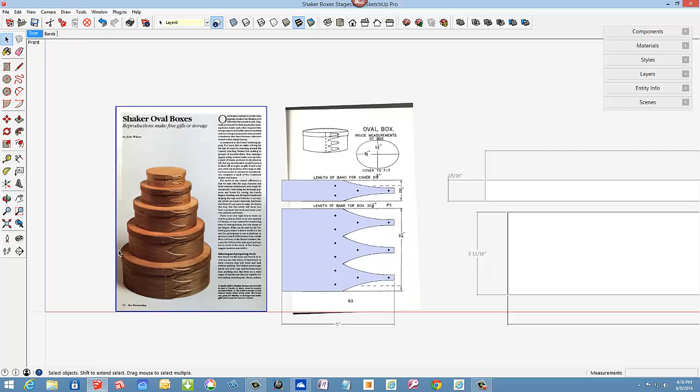The following video shows my process of creating the first stage of making a number 5 shaker oval box.

I use several resources for this. One is a fine woodworking article by John Wilson in September-October 93, and the other is Ejner Handberg's book on shop drawings for shaker furniture.

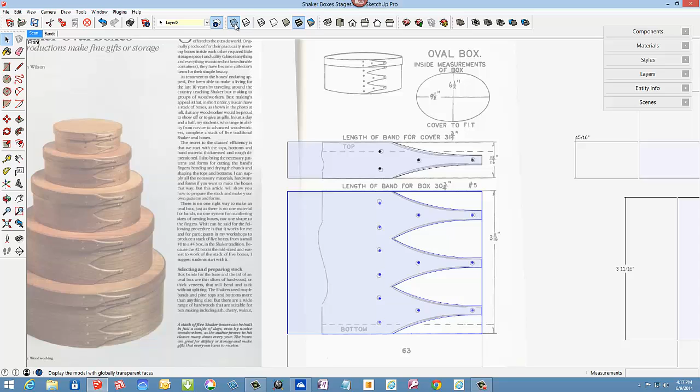You can see that I've made a trace over of the finger shapes, and I've used these trace overs to make the full length bands that are bent around an oval box, or make the oval box.

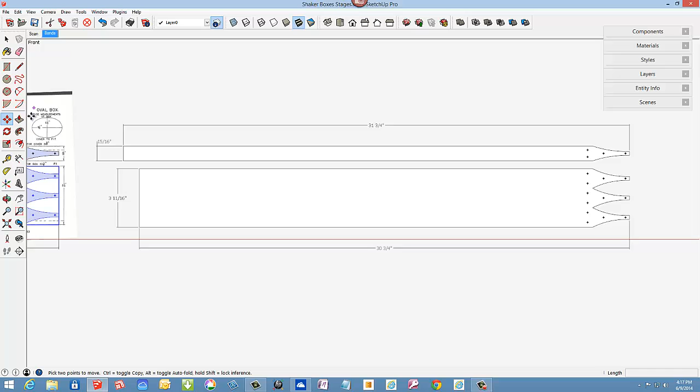So here are the two, both the box band and the upper cover band. The next step is to create the actual box bend, which makes an oval box. This is an ellipse, 6.5 by 9.5.

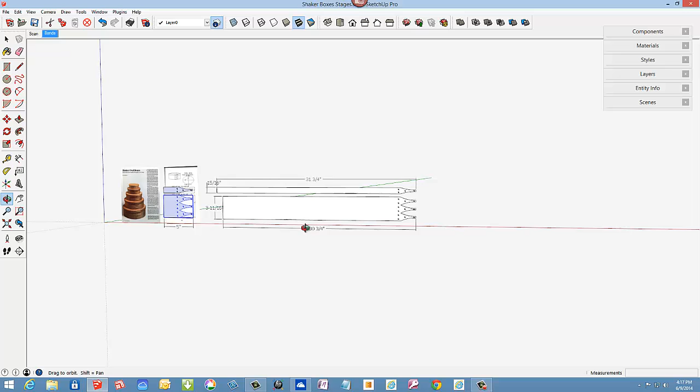I'll go to perspective camera and pick the circle tool to start the creation of the ellipse. Notice that I've used sides at 48. The normal is 24, but with this kind of a small piece, I think that makes sense.

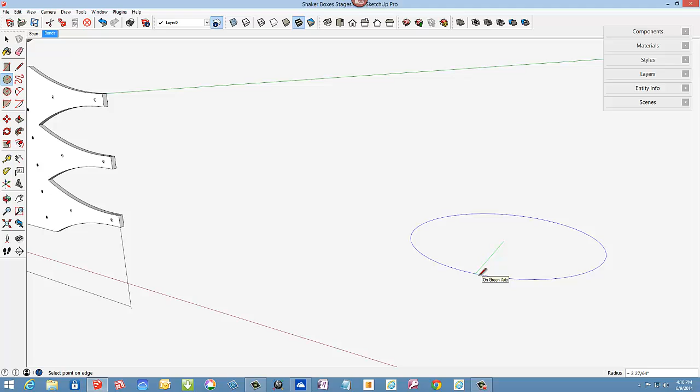Here I'm making the circle at radius 3.25, so I've got 6.5 at that minor dimension of the final ellipse. We need to change this circle into an ellipse, but first I'm going to show the center of the circle.

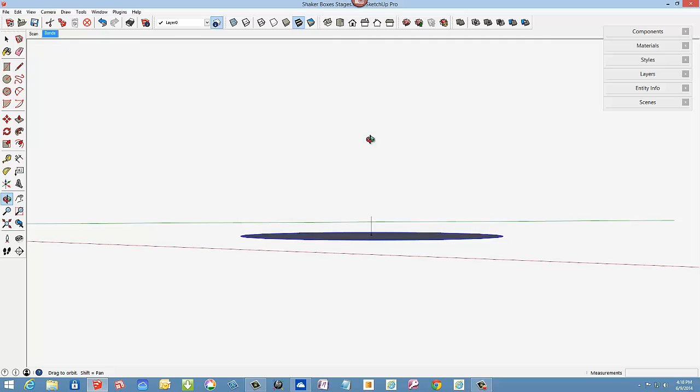I'm going to need this as reference later, and I'm going to show on the blue axis two lines here representing the vertical axis. I'll need those later to fit together the various parts of the oval box.

Here is a radial line on the green axis, showing the length of the long axis of the ellipse, which in this case is 4.75 radius, making the 9.5.

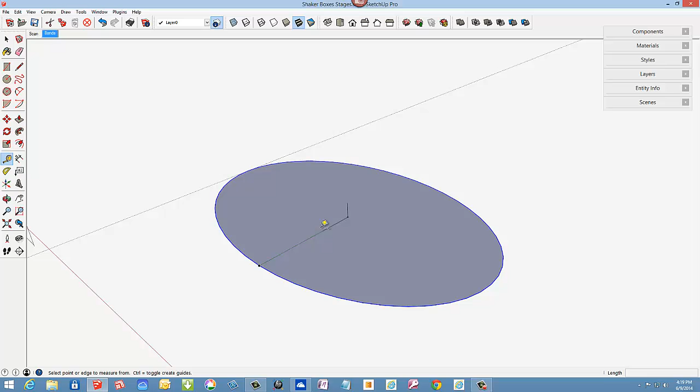Pick the scale tool, hold down the control key so that I'm working across the center line, and go out to the guideline and click to finish the elliptical shape.

Next, I'm creating some guidelines to show where the banding actually overlaps. The overlap is about 5 inches from the beginning to the end, and I'm showing that overlap area, picking the tool to make the thickness of the band.

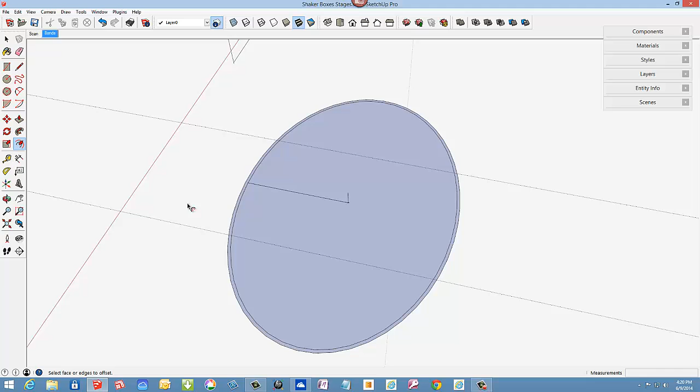Remember, this ellipse shape that I made at first was the inside shape. Now the banding thickness has been added - that's 0.085 inches based on what I've been reading for a number 5 box.

Now with the arc tool, I'm showing that complicated overlapped part of the banding from the beginning to the end, with 2 arcs that overlap here.

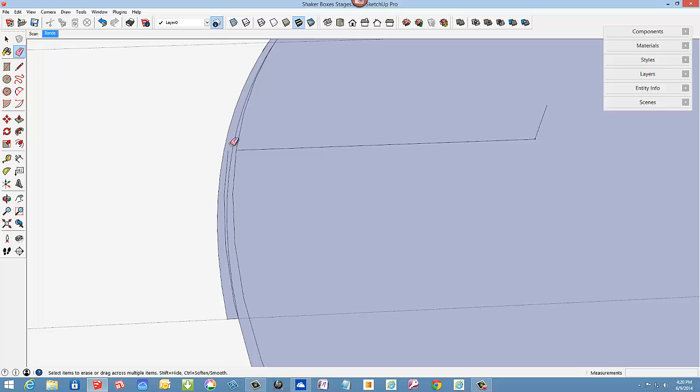I'm going to close up the end here with the line tool, and I can get rid of that original arc line. Now you can see the feathering of the end of the banding, and then the thickness at where the finger joint exists.

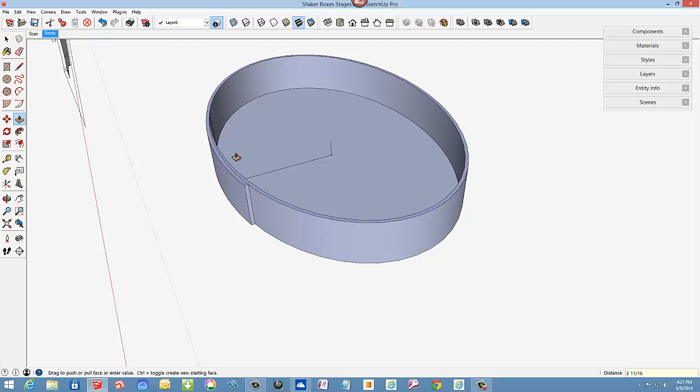With the push-pull tool, I'll bring that banding up to its height, which is 3 11/16 according to Ejner Handberg. I've got the reversed color, so I'll select and reverse faces.

Okay, so I've got square banding that is wrapped around itself and overlapping for about 5 inches, but I need the finger joints.

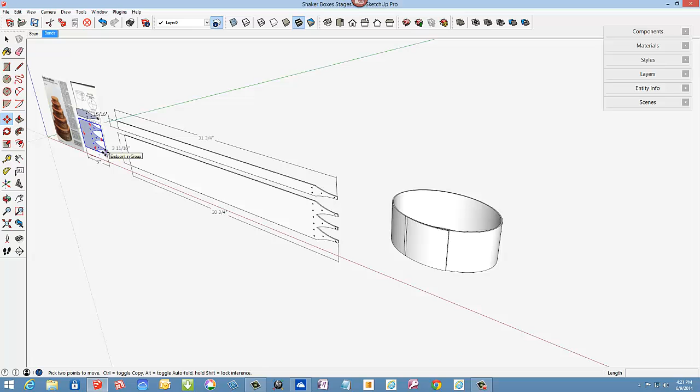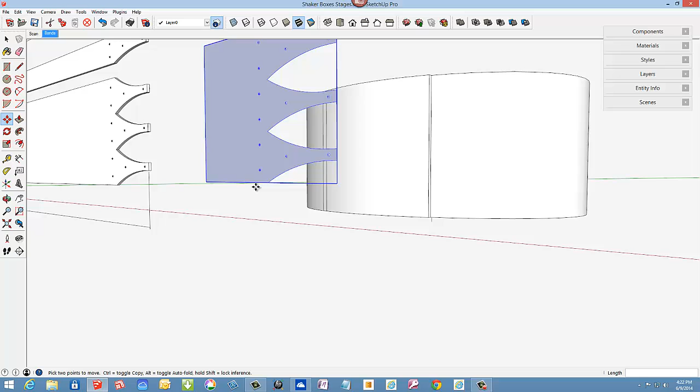So I'm grabbing a copy of the template. It already has all the locations of the copper tacks that are connected together, and I'm just positioning that template exactly to line up with the bended banding.

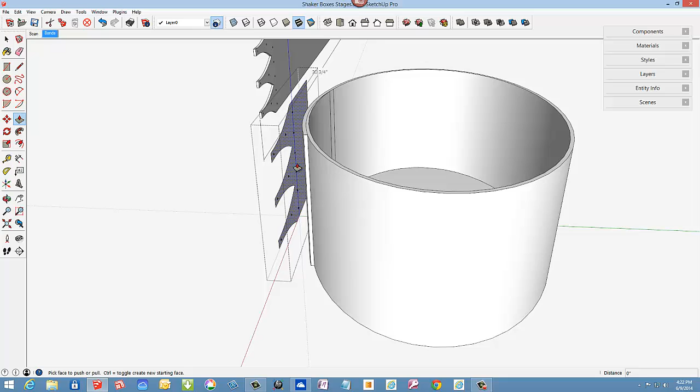Bring the template up closer on the green axis, and then I can do a push-pull to bring that through the banding.

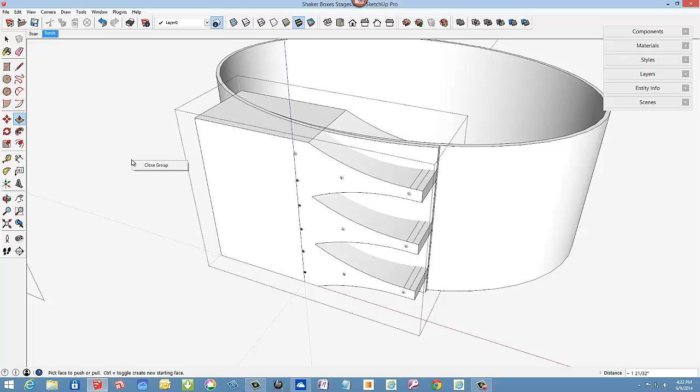And I need to get ready here for the intersect that will create the finger joints. I've got a group here that I would like to just change - I'll change it later. Right now I'm going to select it all, and for safety's sake scale it up by a factor of 10, hoping that will eliminate any small facet issues that might occur.

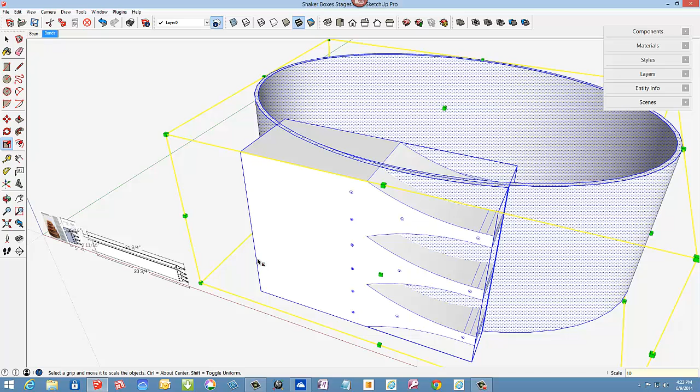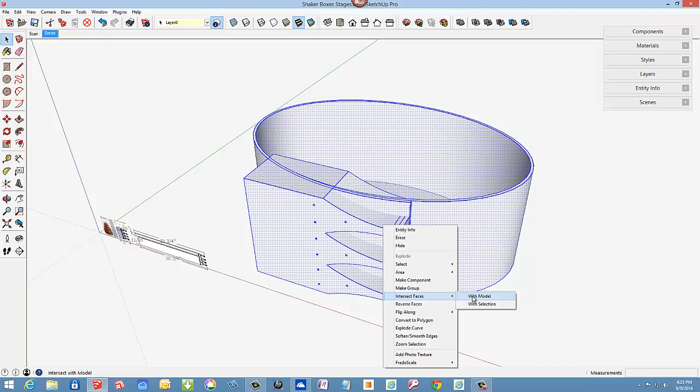Get rid of the scale tool and explode the group, then select all and right click intersect, with model, intersect all of this here, and now we've got a situation of cleanup.

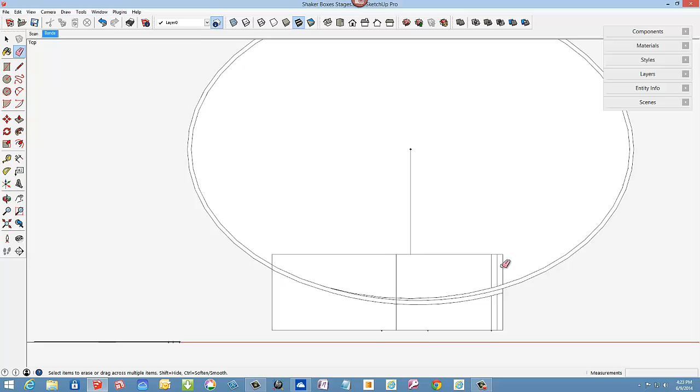The best way I found to clean up is to look at this from the top view and then turn on parallel projection, and then do a right to left select.

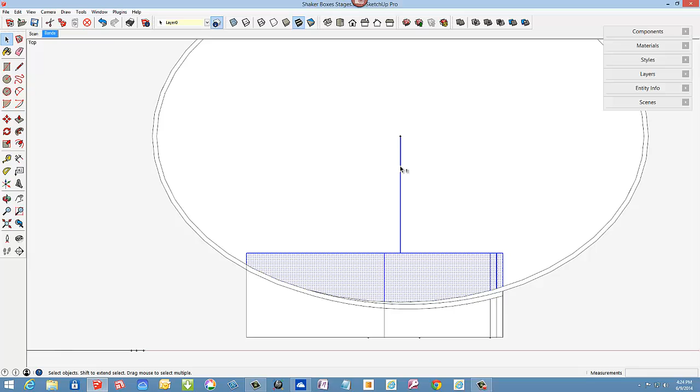I don't want that to delete that bottom, and I don't want to delete that radial line that I made. So I'm holding the shift key to knock those out, and then the delete key erases all that part of the waste, and then delete out front here to clean up that part.

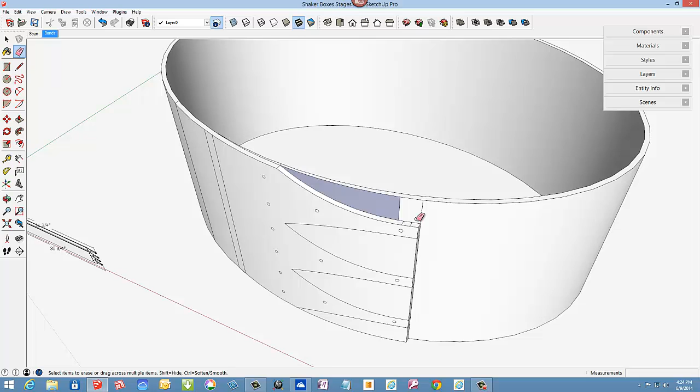Still more cleanup to do. I'm going to use the eraser tool, and this may take a while to get rid of the waste between these finger joints.

I can use the control key with the eraser to drop these lines, smooth out these edges that shouldn't show up, and just delete this waste out in the middle of the finger joints, then reverse faces and smooth out the edges.

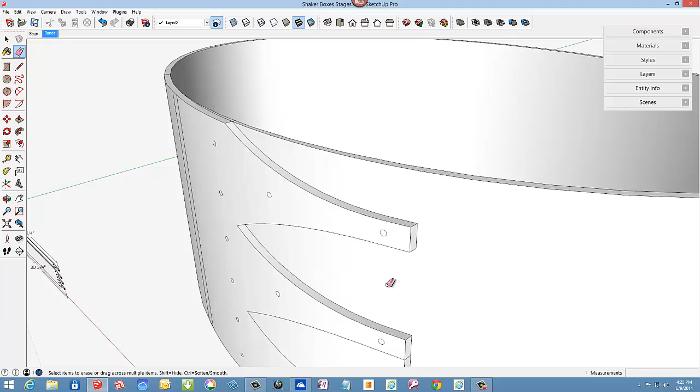Got a couple more places to clear out. Same procedure: delete the waste, reverse faces, and smooth out.

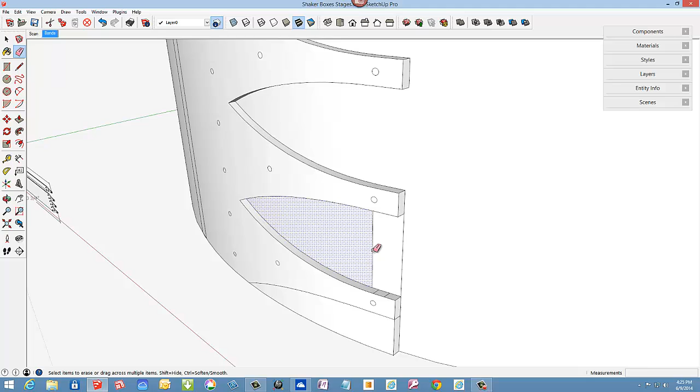So this is the first stage. I want to go through the rest of the stages in making this number 5 box. Next time I'll get into making the cover.

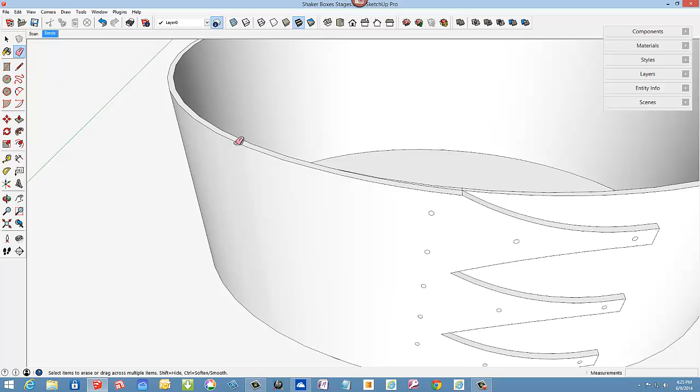Smooth out some more lines on the outside face. I can delete that line up there, that edge, and I can delete a tiny edge right in that overlapped area.

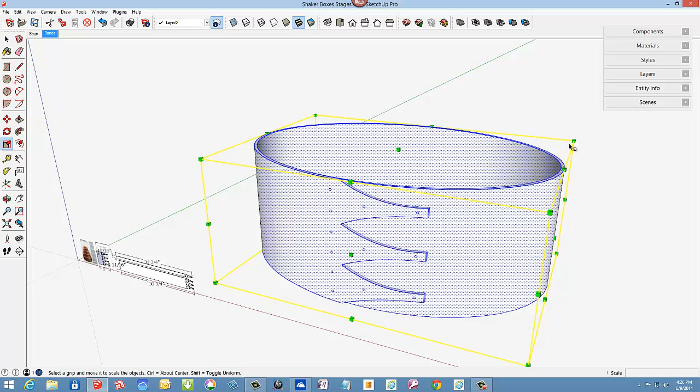We can now reduce this by 0.1 with the scale tool, 0.1, and I'm back down to full size. So that's the first step of getting the box band. Next time I want to do the lid band of the banding.